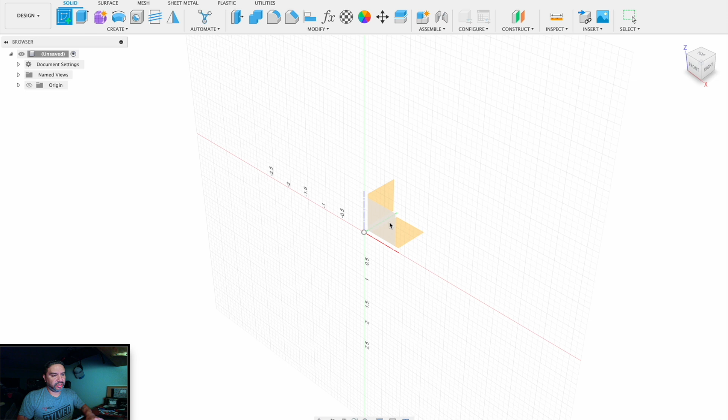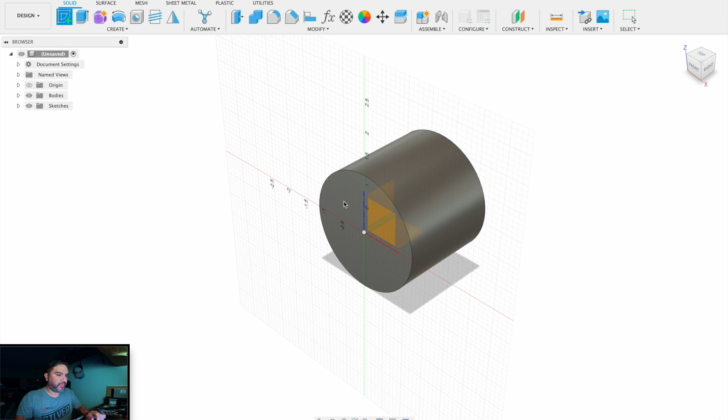We're going to start with a sketch again. We're going to do a 2-inch NPT. So we'll just make a circle. The OD of a 2-inch pipe is 2 3/8. We'll just extrude it back 2 inches because it doesn't need to be huge. We'll put a hole in it that is 2 inches just to make it look like a pipe.

All right. So NPT has a taper. Basic threads in Fusion are pretty easy. NPT threads, you have to make a tapered surface.

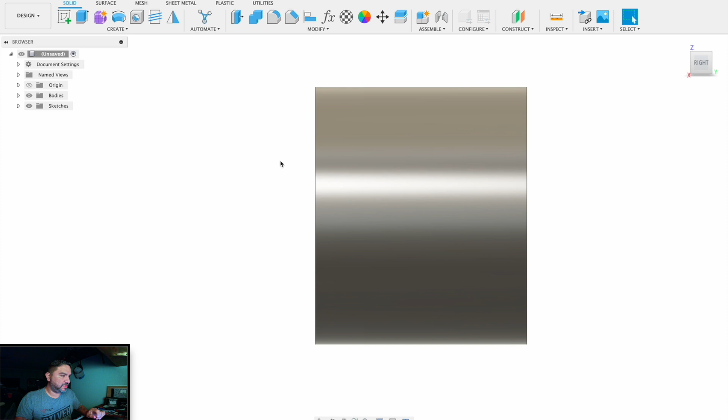So what I like to do is take my cylinder, turn it on the side, and make a little triangle with a line tool. So I'll just go down a little bit, go back so much, and close it off.

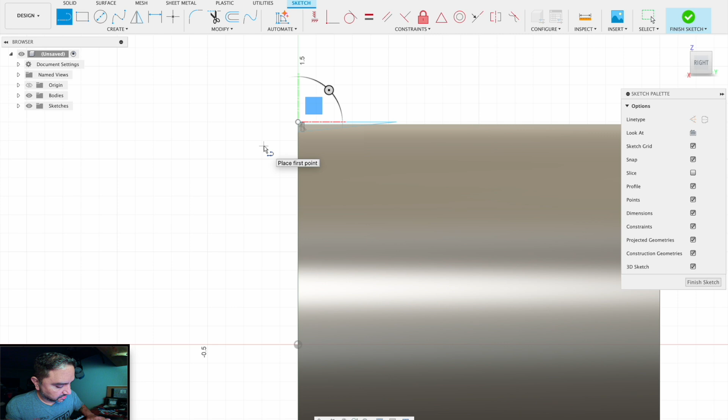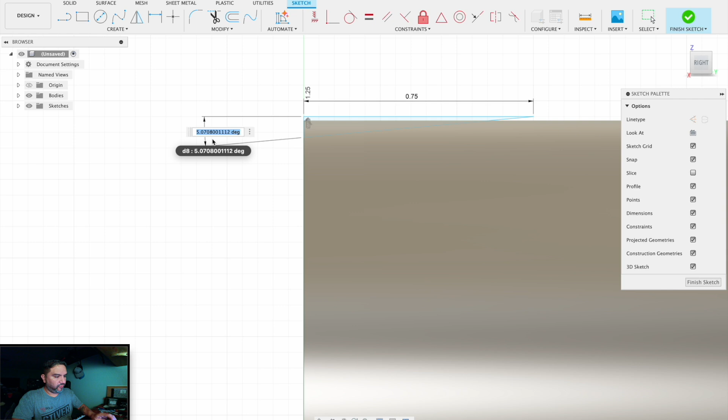And for this video, it's going to be we're just going to call it a 750 length of taper, and we'll make the angle 1 degree 47 minutes. So we'll make a little algebra formula: 47 divided by 60 plus 1. And there we go.

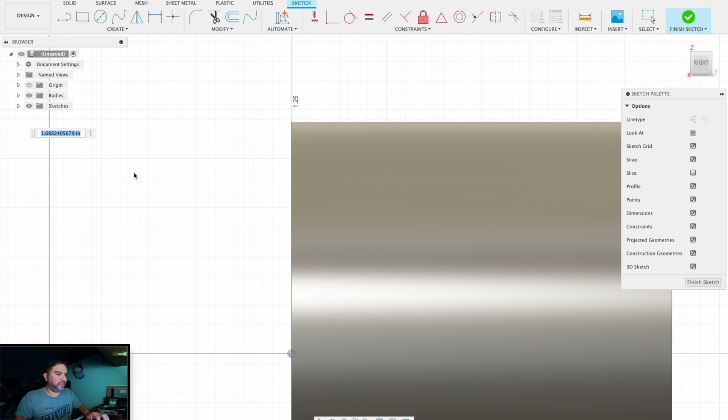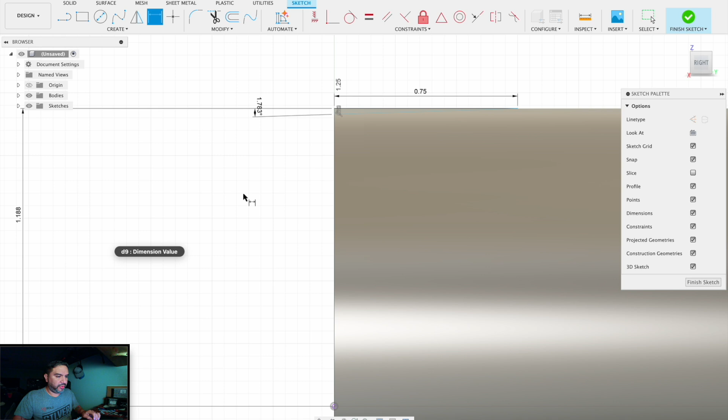Now we're going to wrap this, so we have to wrap it around the OD of the part. And we have to put the long leg of the triangle at the same diameter. So the diameter is 1.375 divided by 2. Maybe not. 2.375. There we go.

And you want to make sure you have the front of the triangle, the front leg, coincident with your 0 point, or your Cartesian 0 right there. That way you don't have a little anomaly or leftover when you spin it, when you wrap it.

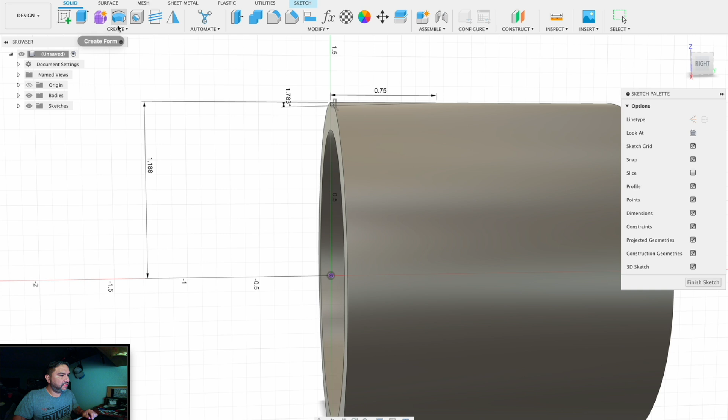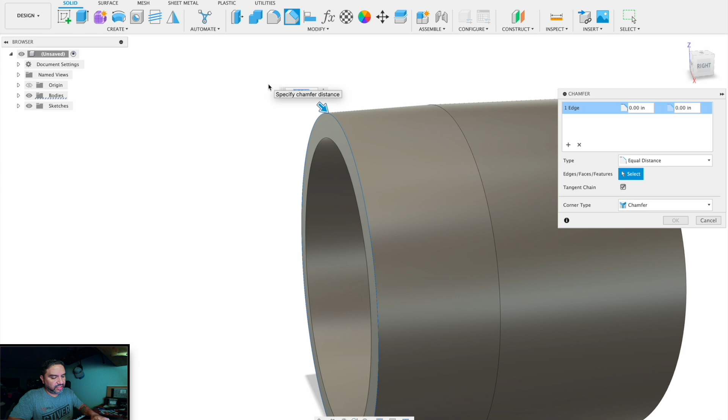So we'll take that, we'll go to solid, we'll go to revolve. It's already selected, we're just selecting the axis. Now we have that tapered section on the pipe. You can go a little further and add, let's say, an 80 thousandths chamfer.

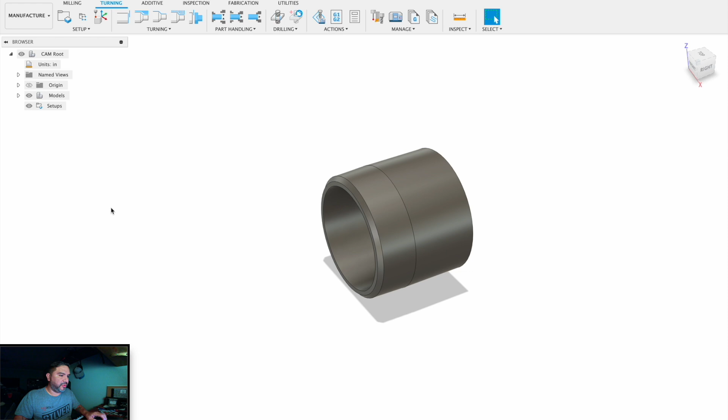So with that, we'll switch to manufacture, and I've already done turning, so this is just going to be the thread. No more, I don't have to do all the other tools and everything like that. OD rough, OD finish, we're just doing threading.

Go to new setup. Z's on the wrong side, so we'll flip it. Tell it our stock is from solid, right there. We don't care about the post. Just call it 2-inch NPT. Why is it not in caps? 2-inch NPT. OD.

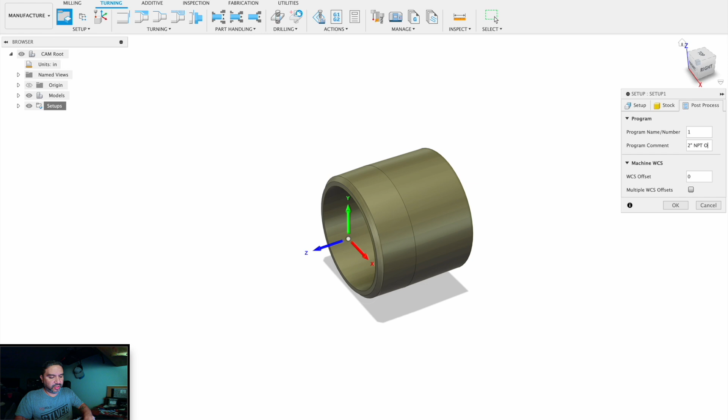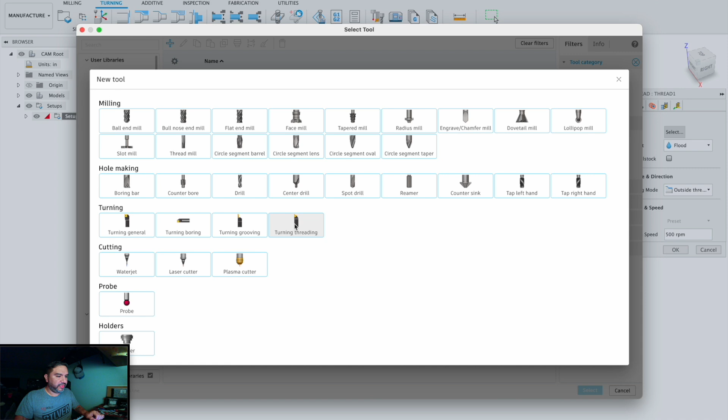All right, right click setup. No, you don't need to do that. Let's go to turning, and we'll go to turning thread. So we're gonna make our tool, plus sign, turning thread.

I think it is 11.5 TPI. So we'll go to the insert. Matter of fact, let's double check the TPI. What is the TPI for 2-inch NPT? It's 11.5. Okay.

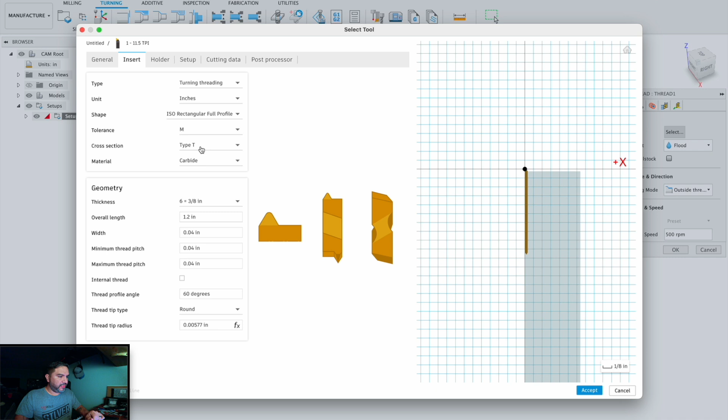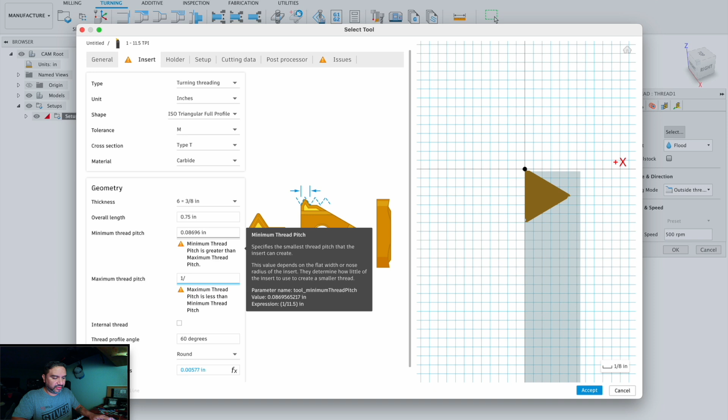So we'll take that. And I like triangular profile inserts. You can change yours however you want. 750 IC, 1 divided by 11.5 for our min. Same thing for max. The rest of that doesn't matter.

Cutting data, 500 is probably too fast. Usually cut stainless, so 250 is fine. Tool 3. Press select. Select again.

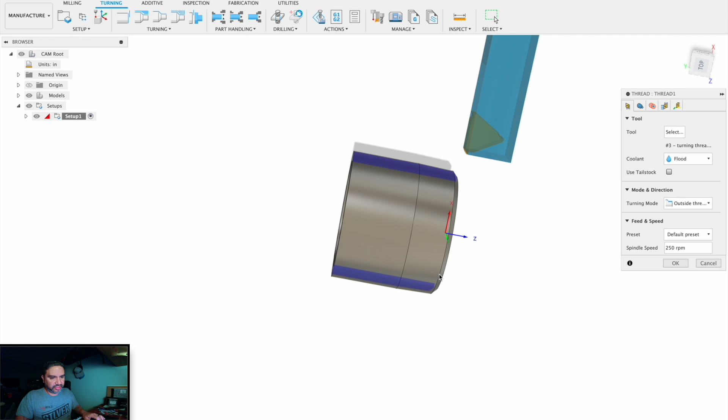Now you're going to get a tool. Rotate around. It's going to ask you, what surfaces are you cutting? I want that one. Now it defaults to some odd number here. I like to do at least 100 thousandths in front of the face, not the threads because of the chamfer.

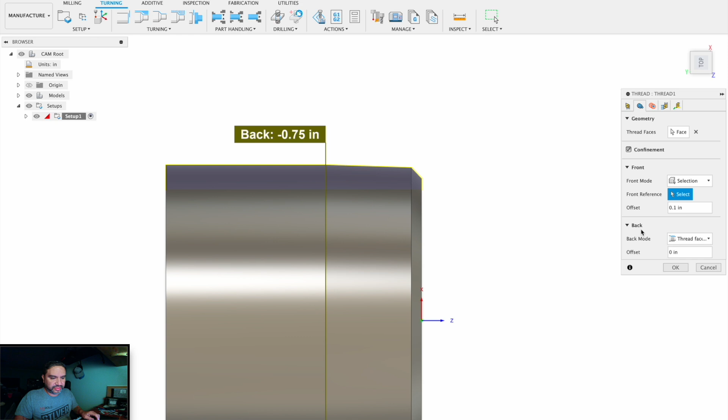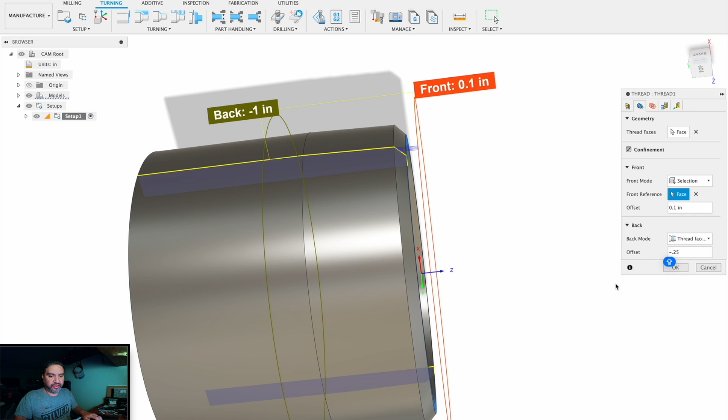Alright, clearance is going to be, I like selection again. You can pick whichever one you like. All you need is 200 thousandths. I don't remember the thread depth. It's probably 78 thousandths.

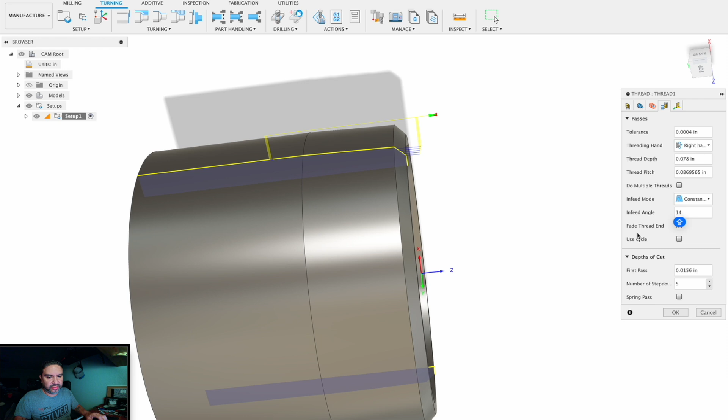The pitch is set. In-feed angle you don't have to change. You can probably put it at 14 so that it ends up being 28 degrees. I don't like fading my insert. My thread is, I do like to use a cycle.

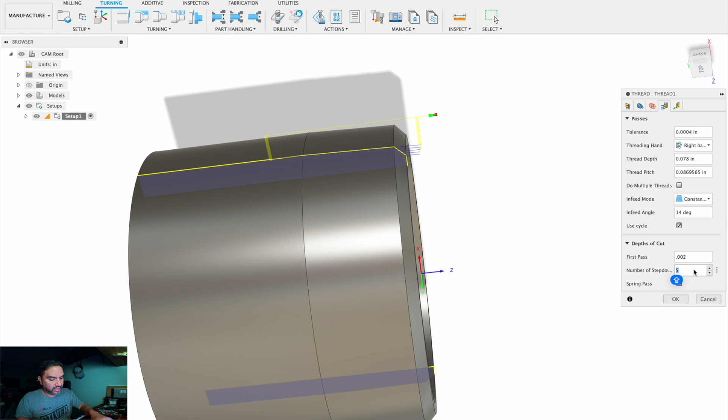And if you're in stainless, it's 2. 2 is pretty high. So 78 divided by 2 thousandths is 39 passes. So we'll make that 39 passes. And if you zoom in, you can see all of those passes right there.

And it ends right there above the chamfer. That's fine. Let's turn that. Press OK. There you have your NPT. And if it looks a little deep, you can use the handbook and get your numbers perfect.

The point of this video is to show you that you need a tapered surface to do a tapered thread. Fusion doesn't like making it with a surface, a cylinder that's straight. GibbsCAM will do it. At least I don't know another way in Fusion to do it.

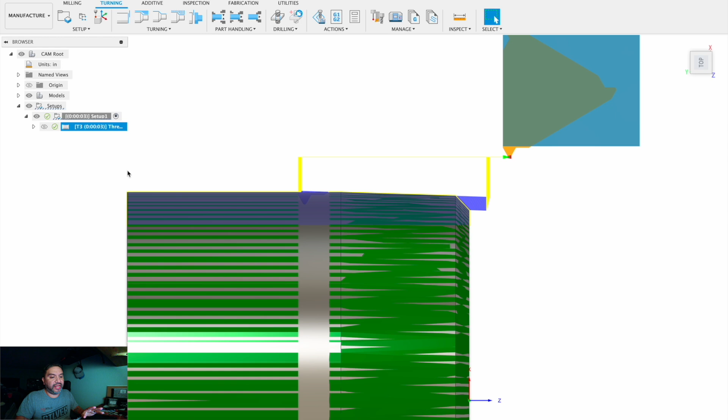So let's take that and we'll post it out. We use a Haas ST10. 2-inch NPT. That's fine, we don't care about the rest of that stuff. Let's post it out and see what we get.

So you have G76, Z-1, I, K, D, A, P3, and a feed rate. So that looks great.

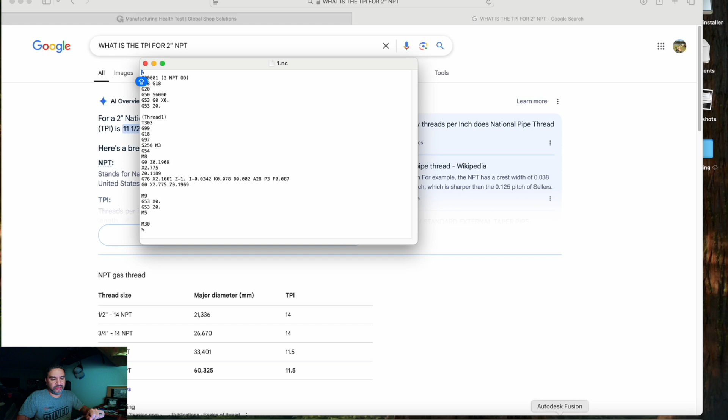Try it out on your machine. Cut air if you need to. Don't fully trust yourself on a fresh part or a fresh program or something you don't know will already work.

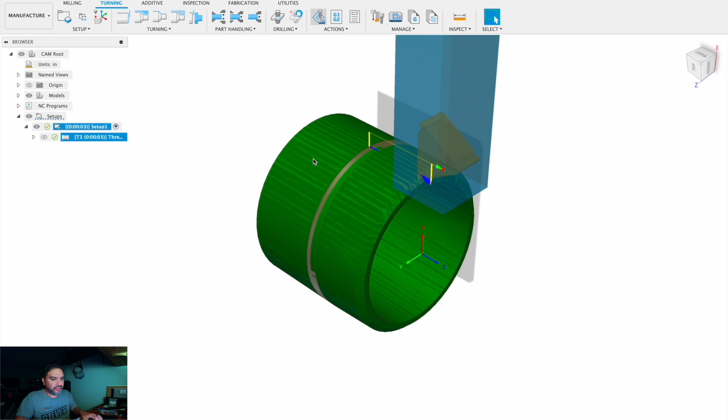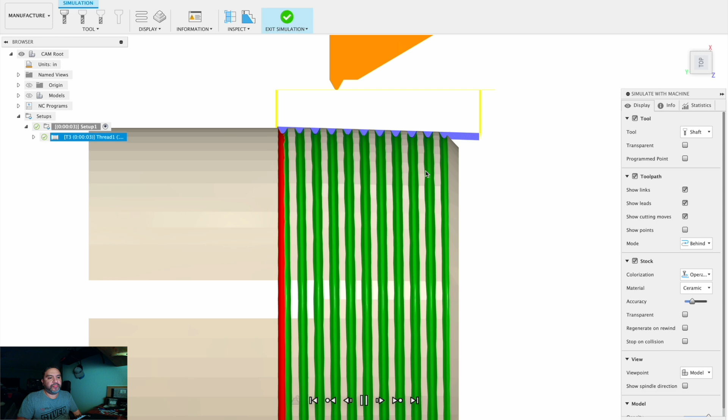Trying to get to a simulation here. Simulate with machine. And here it goes. Let's turn off the model, that way we can see our thread. So that is the simulation.